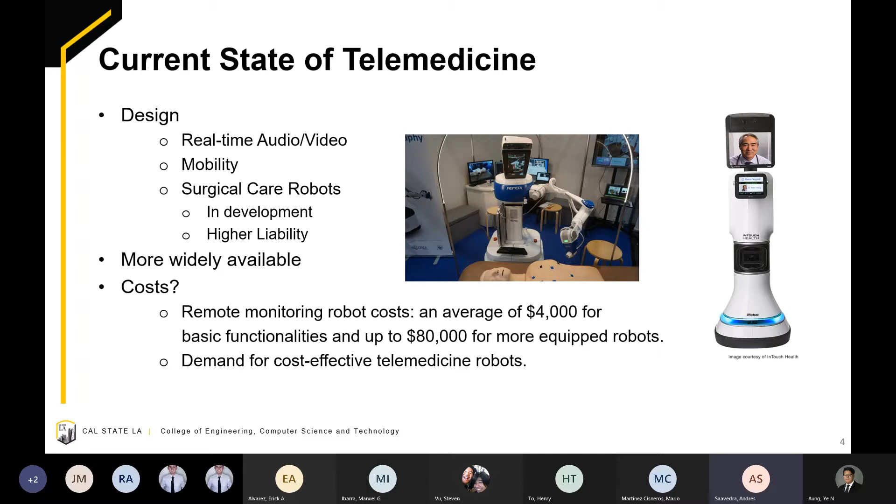The scope of the project includes the design and development of a low-cost telemedicine robot with the following capabilities. It will have driving capabilities for safely maneuvering through patients' homes, an extendable torso, wireless networking capabilities including transmitting audio and video in real time, as well as the ability to manipulate a gripper and measure body temperature.

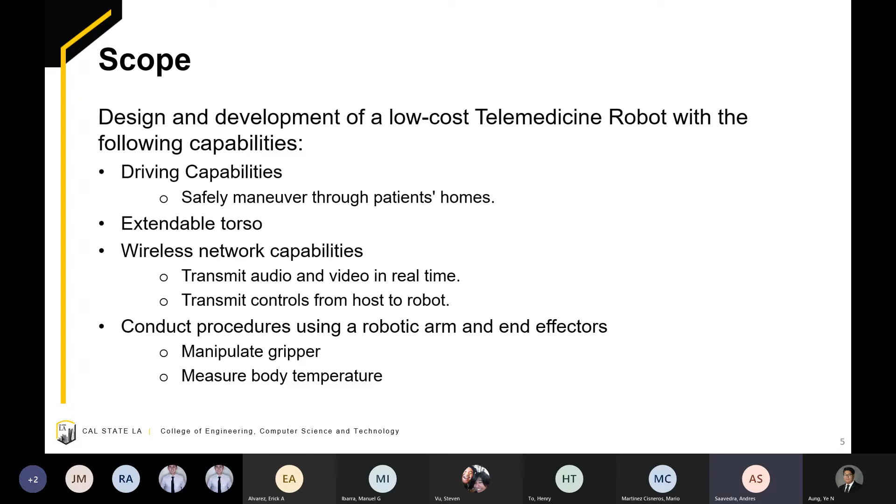On this slide, we have a breakdown of the sub-teams for the project. The robot body consists of two teams: the base platform and central chassis team. The base platform team is made up of Miguel Cano and Erick Alvarez, and the central chassis team is made up of Christian Velez and Reynaldo Aguirre.

The central controller and camera team consists of Steven Vu and Mario Cisneros. The robotic arm was also split between electrical and mechanical sub-teams, with the electrical team consisting of Aung, Andres Saavedra, and Jose Martinez, and the mechanical team consisting of Manuel Ibarra and Henry To.

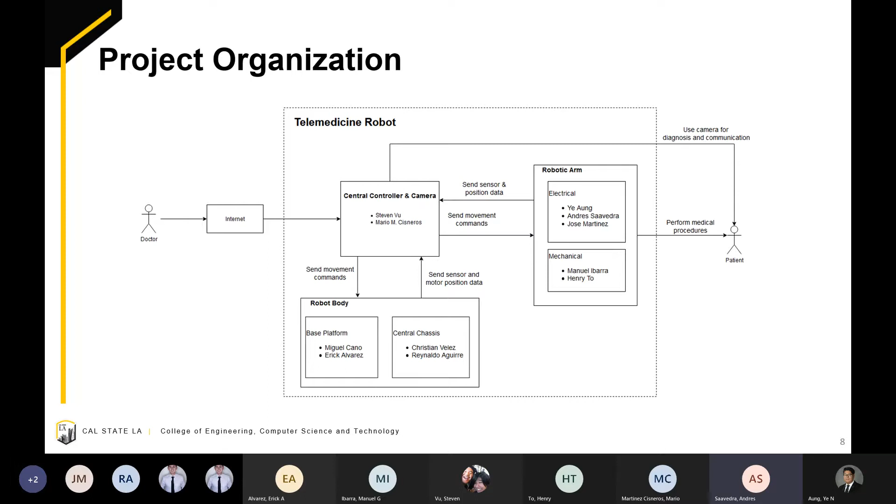My name is Miguel, and my team member is Erick, and we will be presenting the base platform.

Here we compare the current design with the old design. The old design's total weight was about 33 pounds, with the total cost being about $204. The new design is 16.2 pounds and costs $34.42. Comparing the old with the new design, it weighs 16.82 pounds less and costs $169 cheaper.

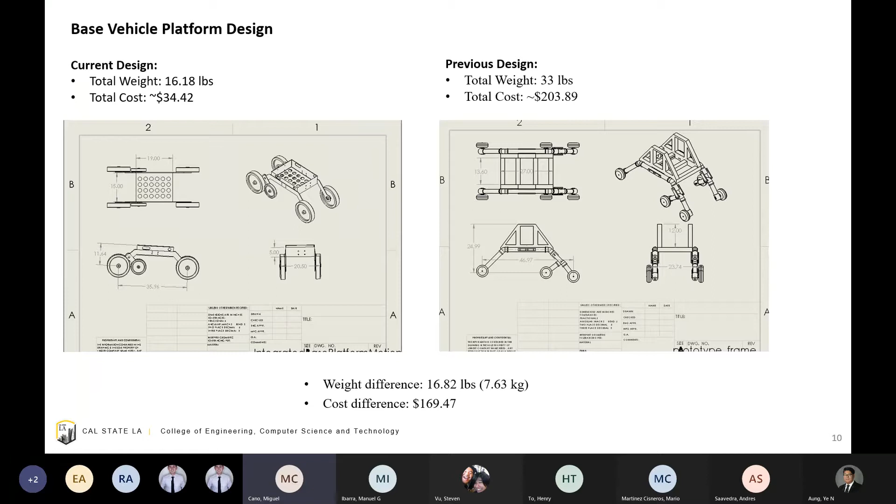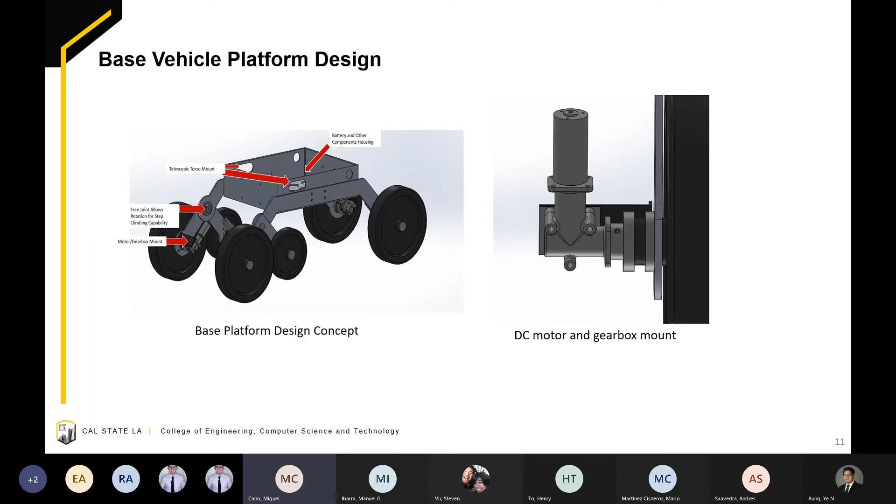Here we have the base platform design concept. The design features a mount for the telescopic torso subsystem, a housing for batteries and other components, a motor gearbox mount, and a free joint on the front legs that allows rotation for step climbing capability. The design is powered by 6 DC motors, and on the right we have a zoomed-in view of the gearbox and DC motor mount.

One of our subsystem requirements was to be able to support the total weight of the robot of 60 pounds. To test the strength of the 7075 aluminum design, an FEA simulation was performed. The design was fixed about the wheel mounts, pin and bolt connectors were added, gravity was applied to simulate the weight of the frame, and an 80-pound force was applied to the base.

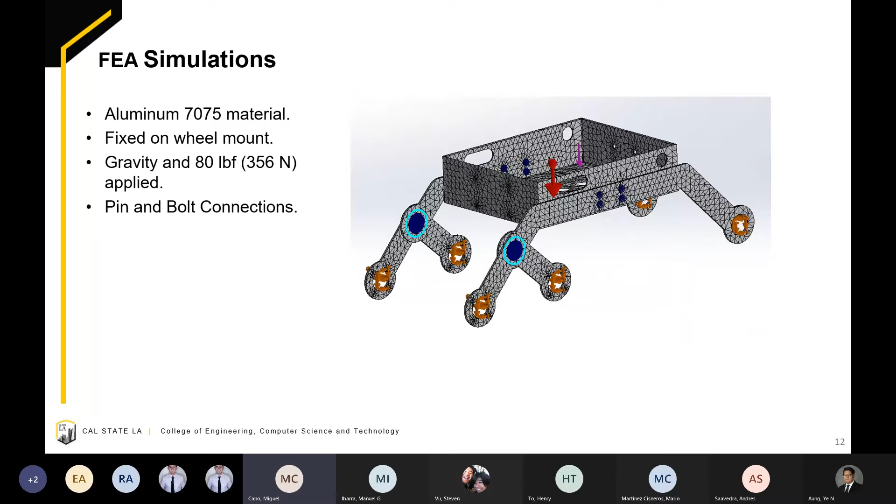The stress plot generated is shown on the right. The maximum stress experienced by the frame was 99.6 megapascals, which was below the yield point of 505 megapascals.

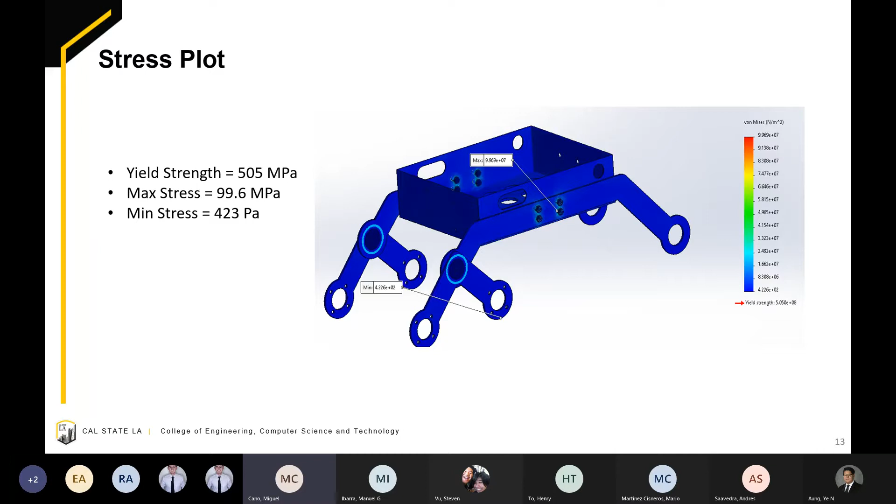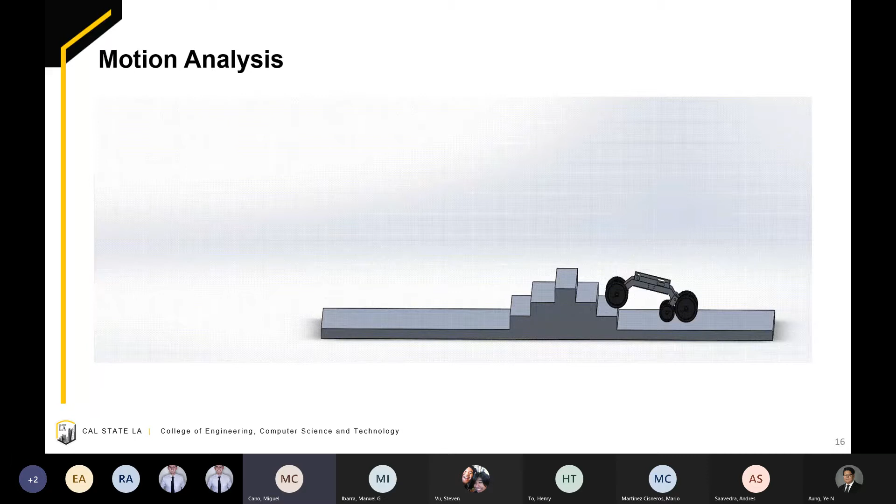A motion analysis was performed to test the step climbing capability of our design. Gravity was turned on and a 60-pound force was applied to the top of the base. The design was only able to climb the steps when all 6 motors were used.

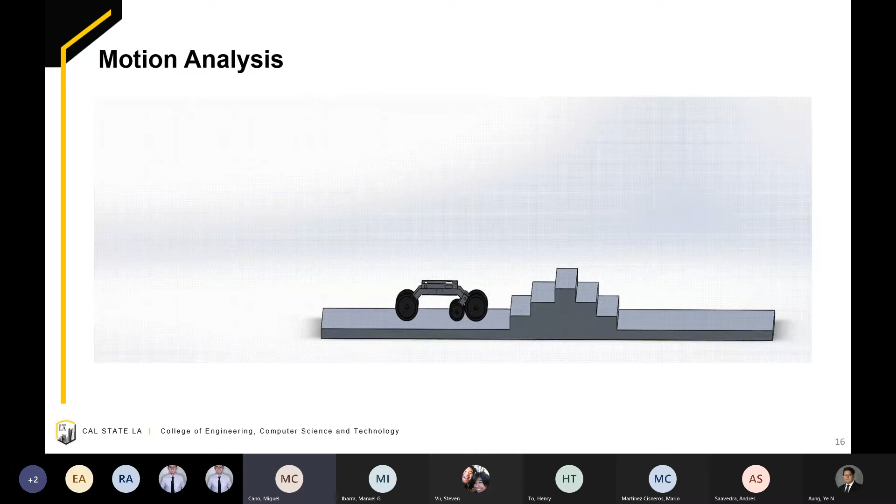The minimum kinetic friction coefficient required to climb the steps was 0.75, and 0.76 for static friction. 12-inch wheels were also required to climb the average step size of 6 inches.

Here we have the motor torque required on each wheel to climb steps. The maximum torque required from our motors was about 2,000 Newton meters.

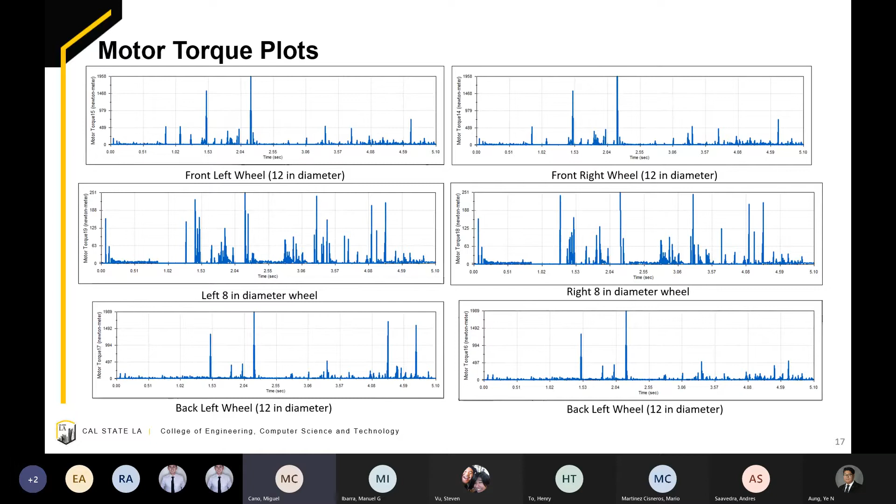Hi, my name is Erick Alvarez. I'll be talking about the DC motor control and the batteries for the robot.

We will be using the BeagleBone Blue in order to control the DC motor. It is Wi-Fi and Bluetooth compatible, which will allow the doctor or nurse to have control of the robot from a distance. The BeagleBone Blue will allow us to create a kill switch so that the robot avoids running into obstacles.

The motor comes with a built-in optical encoder, which can help the robot detect its surroundings. It also allows for 103 Newton meters of torque, which is fairly high for a DC motor.

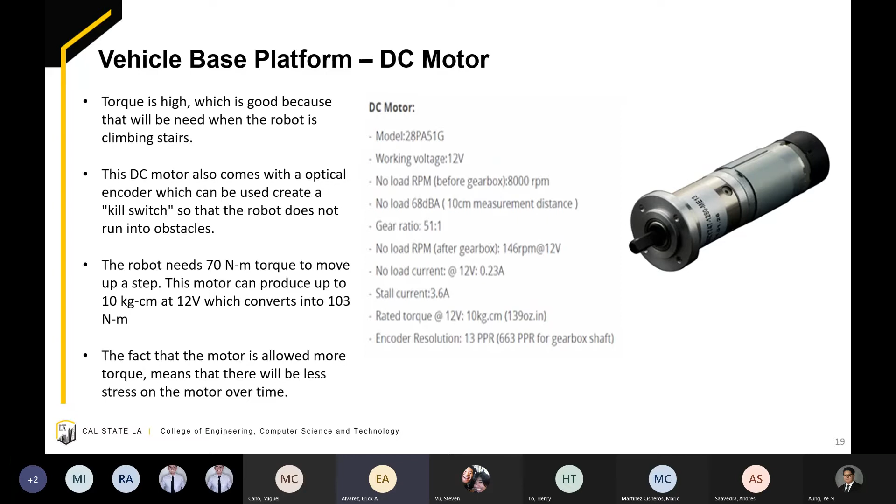This is our power consumption data table. This is worst case analysis, as in all the components are using maximum power at the same time. In order for the microcontrollers to last 40 minutes, they need 7,600 milliamp hours, and in order for the motors to last 25 minutes, we need 20,000 milliamp hours.

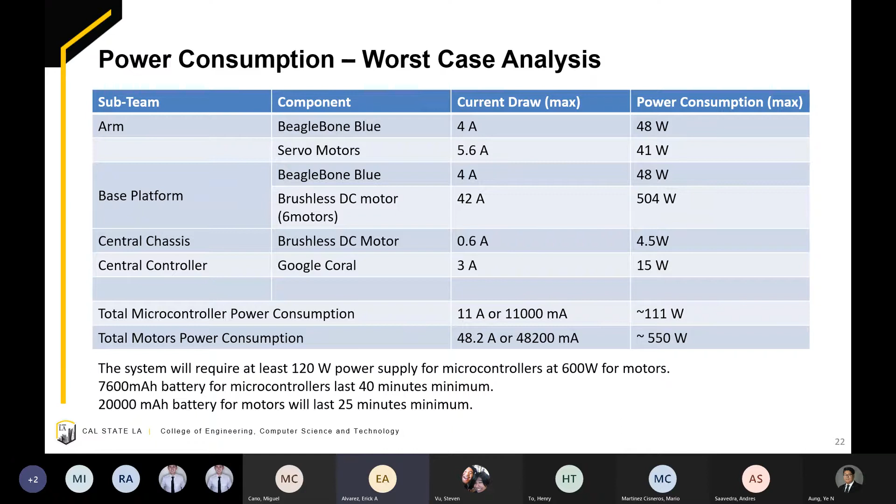Because there are so many components, we thought it'd be best to have 2 separate batteries. This is the one for the vehicle base platform. It's easy to integrate with DC motors, and it's designed for multi-motor use, which we'll need for our 6 motors.

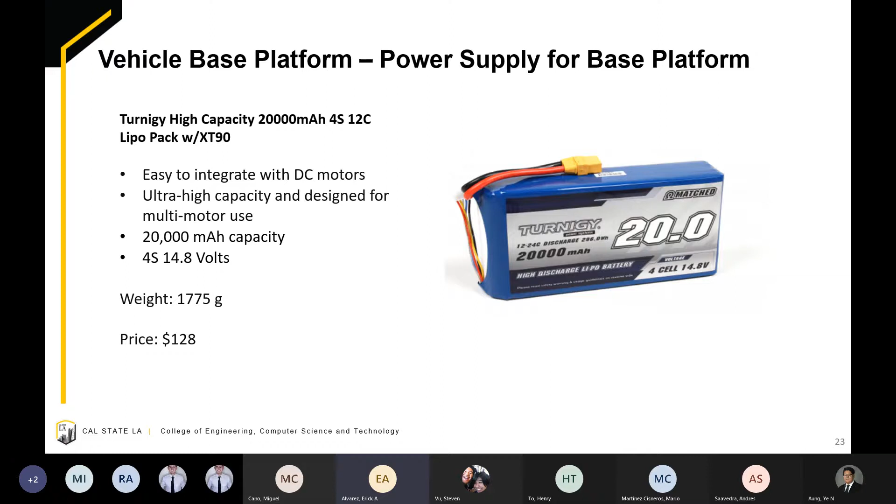This battery will be used for the rest of the robot. It is a rechargeable, high-capacity lithium-ion battery, and it can last up to 2.5 hours.

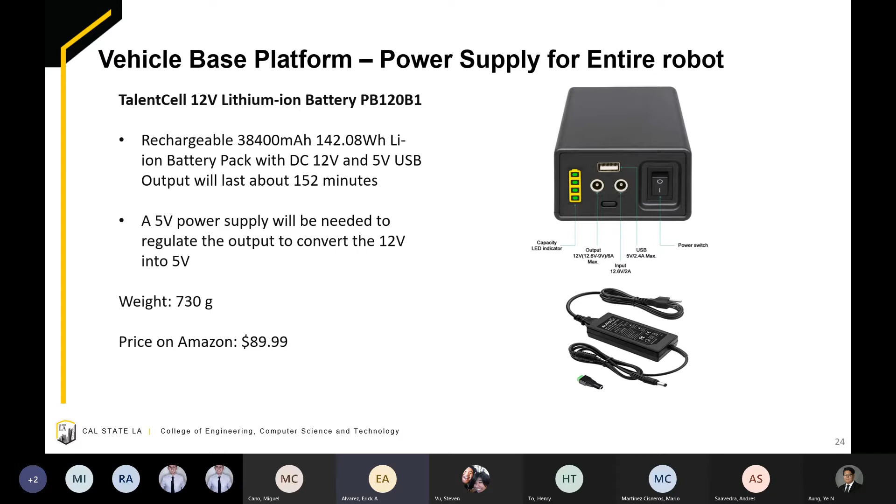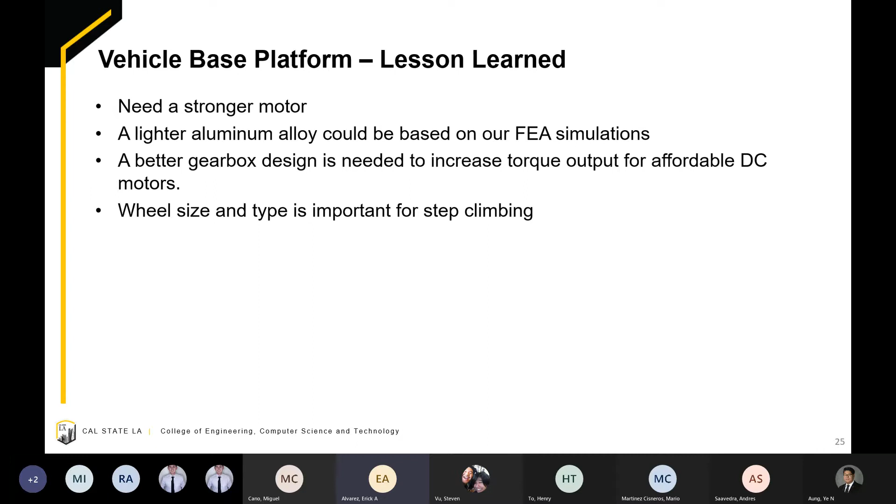Lessons learned: Originally, we had a weaker motor, so we had to find a stronger motor with a higher torque. Then we had to use a lighter aluminum to shave off some of the weight from the platform. Also, to move up the steps, we needed to create a gearbox for the rear wheels to create a higher torque, and more affordable DC motors. We also learned that the wheel size and type are important for step climbing.

Hi, my name is Christian Velez, and I work with Reynaldo in the central chassis team.

Rods were also applied for added support. And going into the current design...

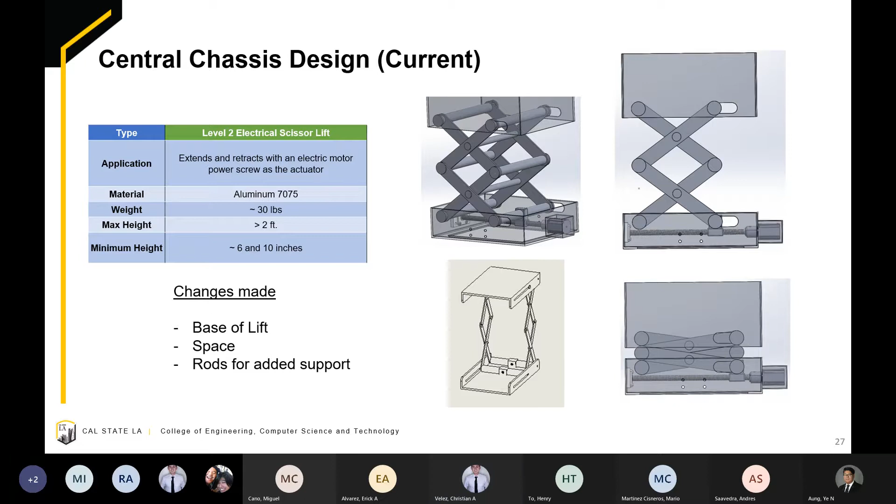The scissor lift is able to support the experienced load, the effective load of 40 pounds: 30 from added components, and 10 from the scissor lift components itself.

The force required to raise a load of 40 pounds is 110 pounds. So the actuator design that was chosen was a power screw driven by a motor to provide a mechanical advantage to the design. In order to determine motor size and screw design, the drive torque was determined to be 10 pound-inch to lift the load.

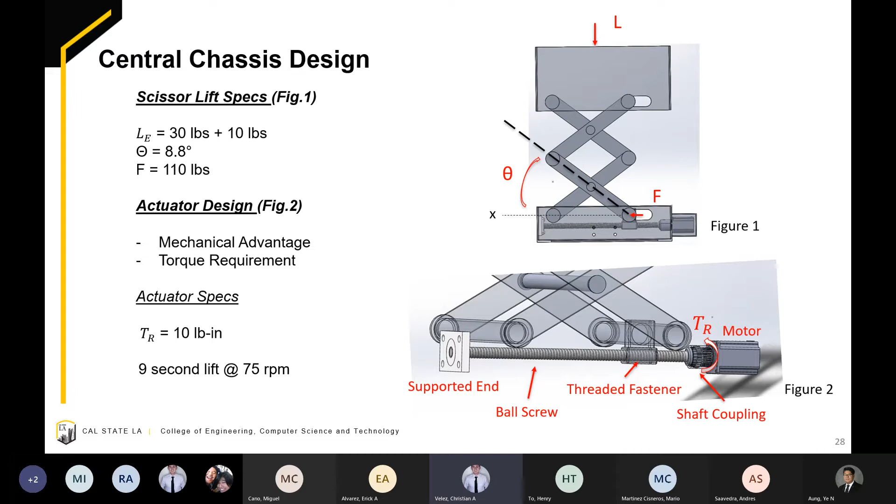This current ball screw design is able to lift the robot in a total of 9 seconds at 75 RPMs. In the next slide, the chosen motor will be discussed.

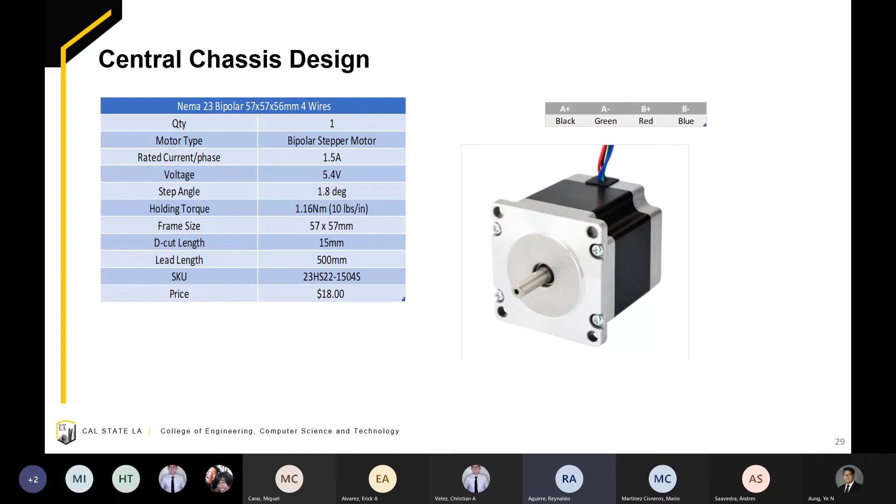To accommodate the new central chassis design, we have now decided to use a bipolar stepper motor. This stepper motor will have a holding torque of about 10 pounds per inch and will cost about $18.

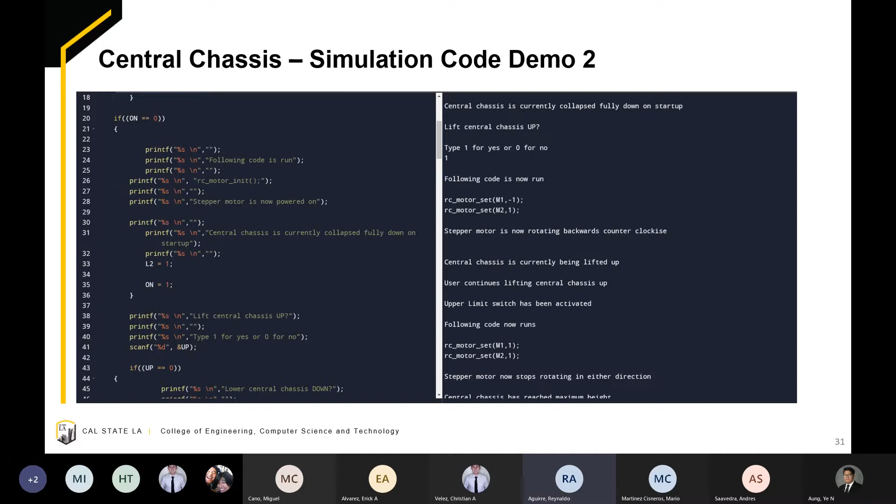In the second demo here, the user now wishes to raise the central chassis fully, extending it up. And like before, the upper limit switch will activate to stop the stepper motor from rotating further.

Some things learned during the project was that we should use a different microcontroller, as the BeagleBone Blue wasn't compatible with later components we wish to use on the central chassis. And regarding sterilization, we hope any future teams can test and prove which methods are effective due to the restrictions preventing any testing for now.

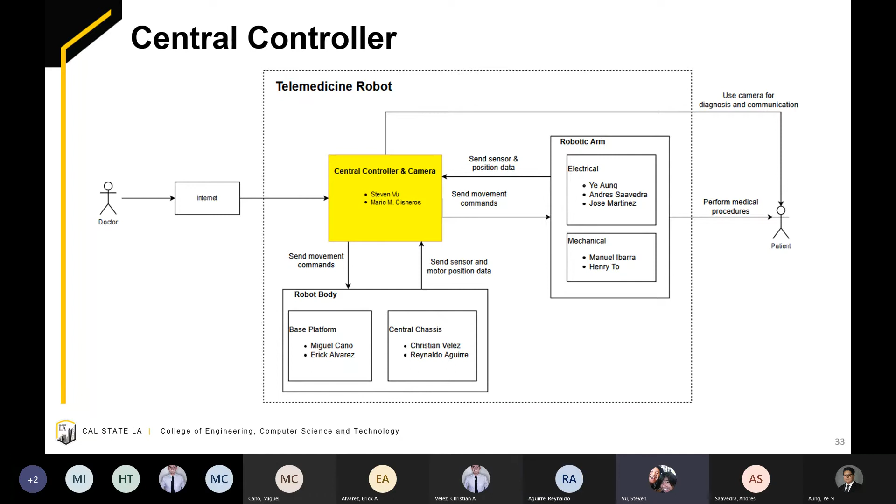So this is the original design of our central controller and its networking. It's showing how everything is connected from the user towards the server, and from the server towards the central controller.

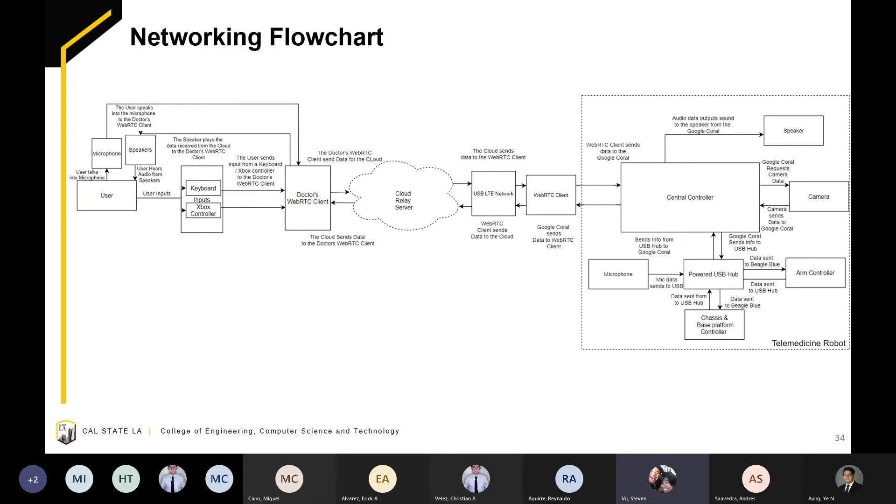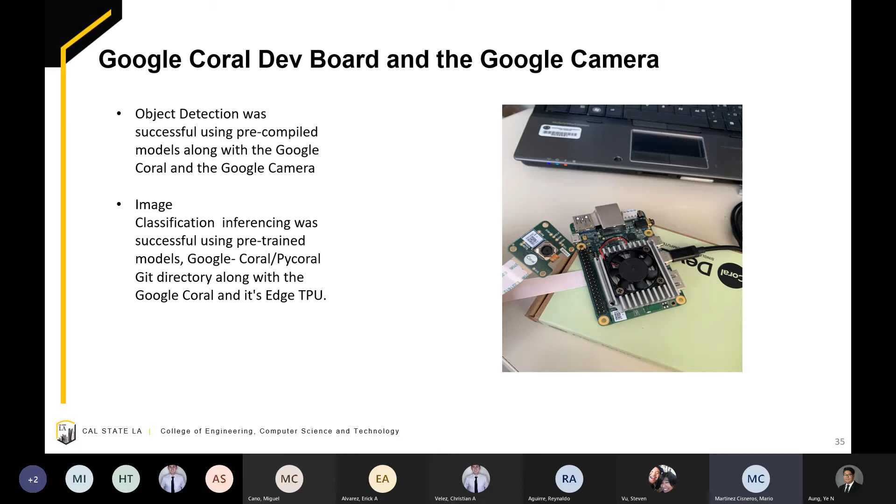Object detection was successful using precompiled models along with the Google Coral and the Google Camera. Image classification inferencing was successful using pre-trained models, Google Coral, PyCoral Git directory, along with the Google Coral and its Edge TPU.

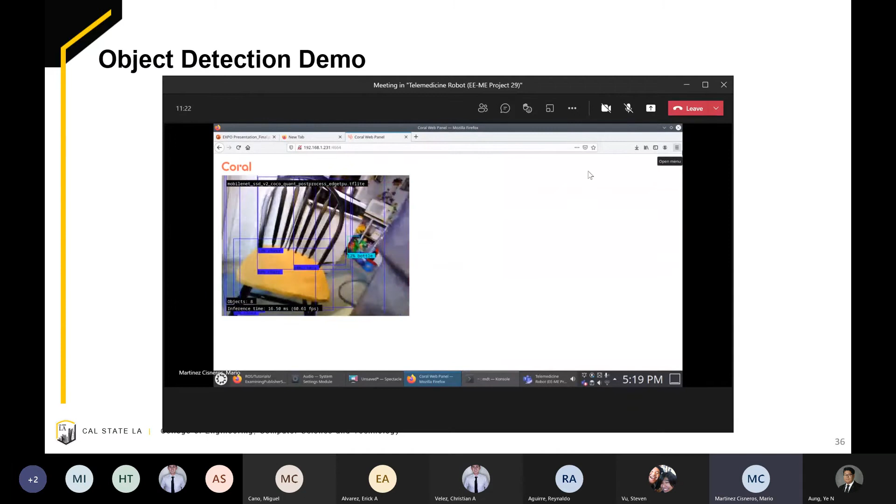Object detection was achieved by using precompiled models and a pre-built demo application called Edge TPU Server, which points to the precompiled models. We can see a live view using the Coral camera running through the Edge TPU and the model. We can see the live object detection inferencing on the screen.

Weight imprinting was used to retrain an image classification model. The demo on the Coral page trains the model to recognize 10 classes. I then added 7 classes, so in total we now have 17 classes. We can always retrain this model to recognize a new class.

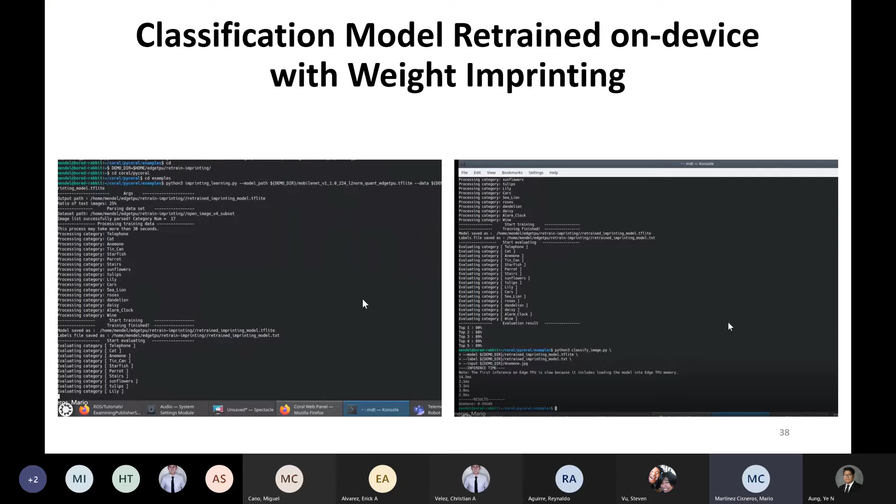Once the server is initiated, the user establishes a media connection on the handler, which tells the server that the media was obtained. Next, the user sends this info to the server and sends a URL to the patient.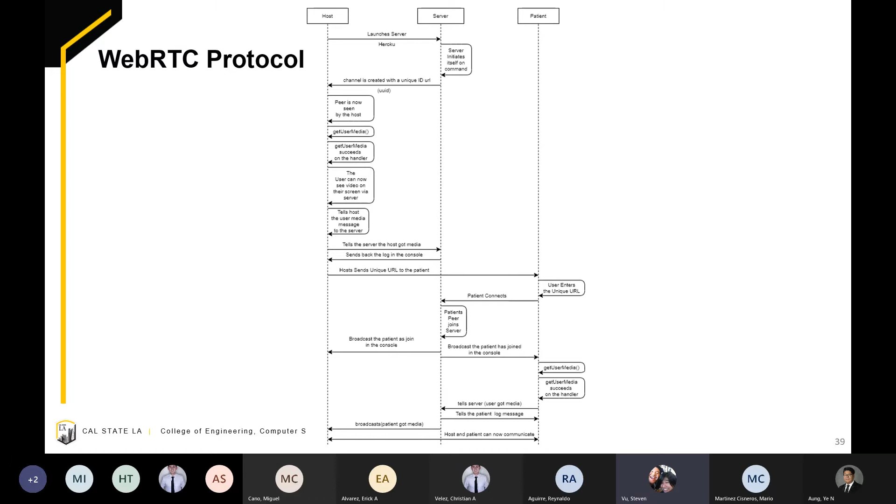And once the server establishes the media connection, once the connection from peer-to-peer is confirmed, they are able to talk to each other via audio and video.

So in my demo, I am deploying a cloud-based service, Heroku. The terminal auto launches our server with a unique ID, which I will be highlighting at a specific part of my URL.

Now I am deploying another link to show that these two rooms have different URLs, to prove that these two rooms are unique.

Now I send the first link to another computer and it is entered as shown. In the other tab, we will see that the other computer did not join, which is a good thing, because we only want the first link that we use to initialize to have the new computer or peer-to-peer connection to show.

So at this moment, I am testing if this message is being sent from the second link to the first link, which is not something we want, which is shown on the right.

Now I am typing from the main computer to my laptop, which is hosting the server. And we can see that 'hello' was shown on the main server.

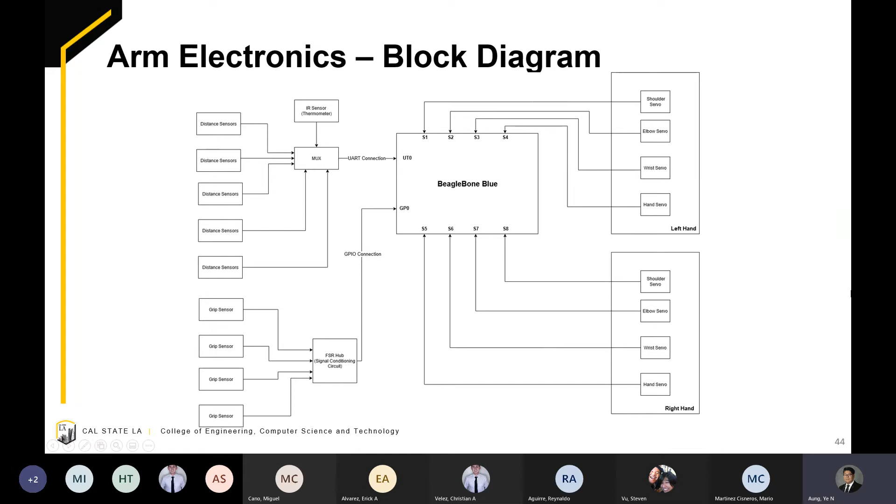This block diagram shows how all the electronic systems will be integrated together with the BeagleBone Blue. However, we were not able to implement this system due to the COVID-19 restrictions. So we developed each sensor system as well as the motor system independently and created test benches for each subsystem.

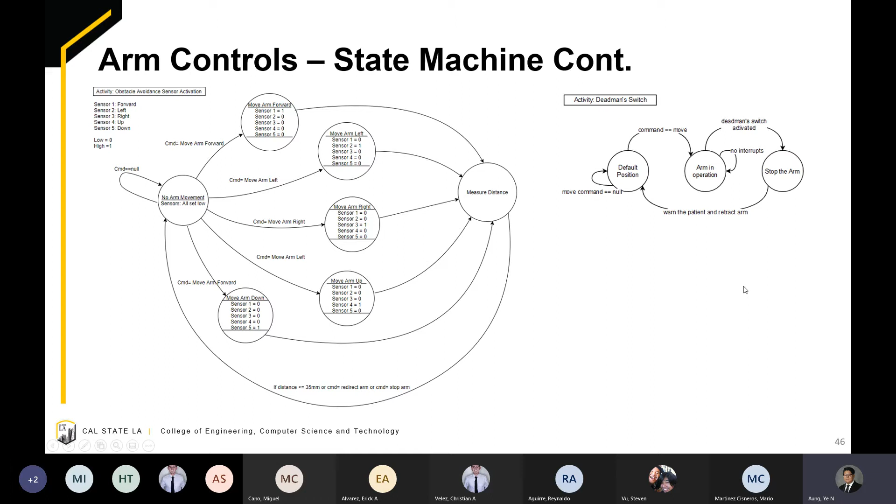These were the finite state machines we developed in the beginning of the year to help us as a guide in implementing our code, as well as these are the finite state machines for implementing the code for distance sensors as well as the deadman switch algorithm.

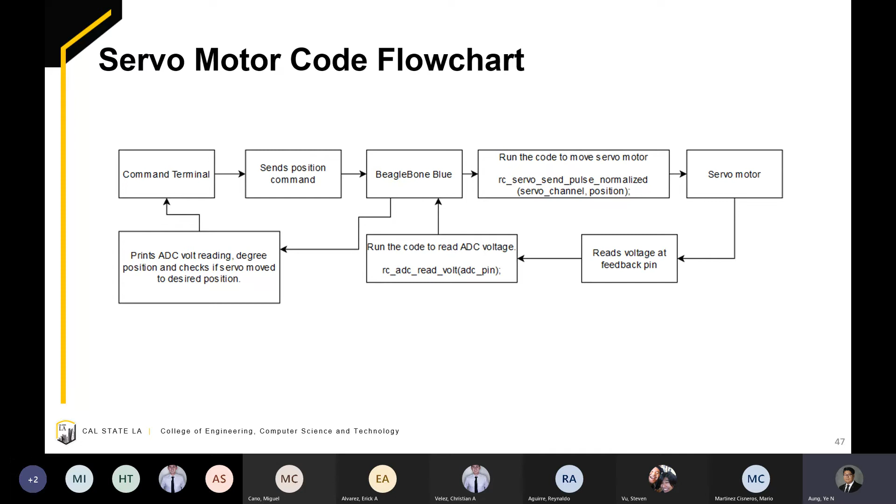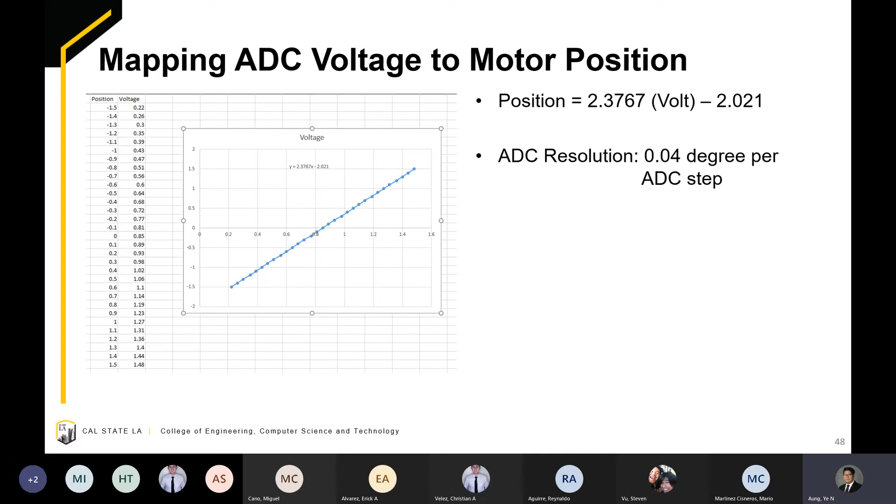Here you can see how we map the ADC voltage to the motor position. An equation was generated on Excel using the trendline functions and graphing through position and voltage data points. With the current setup, the mapping yields ADC resolution about 0.04 degree per ADC step as so far.

Hello, my name is Jose, and I'll go in depth with the servo motor. Here you can see the test bench for the servo motor and the schematic of the setup. The BeagleBone Blue is connected to the servo motor signal pin where it will receive the movement commands. The servo motor is also powered by an external 5-volt power source.

We updated the circuit to include the ADC port from the BeagleBone Blue and added a voltage divider circuit. The ADC pin is utilized to read the position feedback of the servo motor. The feedback pin is connected to a voltage divider with two 10K resistors to scale the voltage level.

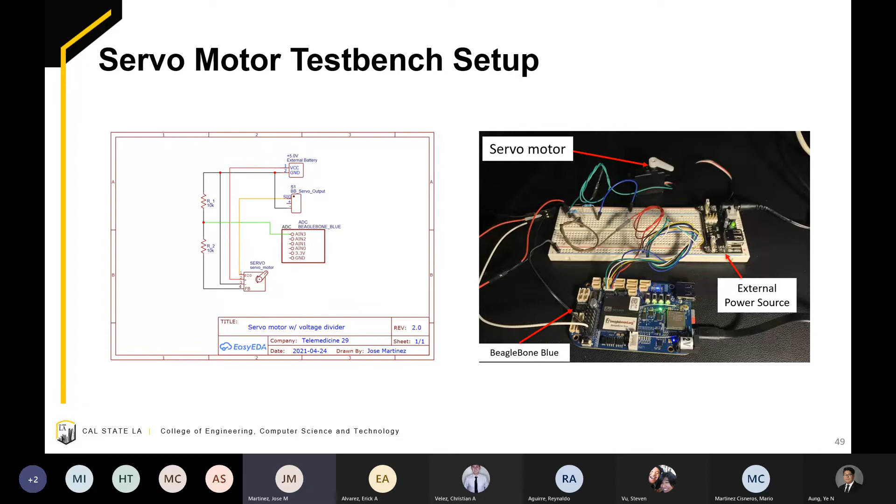The original plan was to incorporate 4 motors, but due to COVID restrictions and limited time, we were only able to test out 1 servo motor.

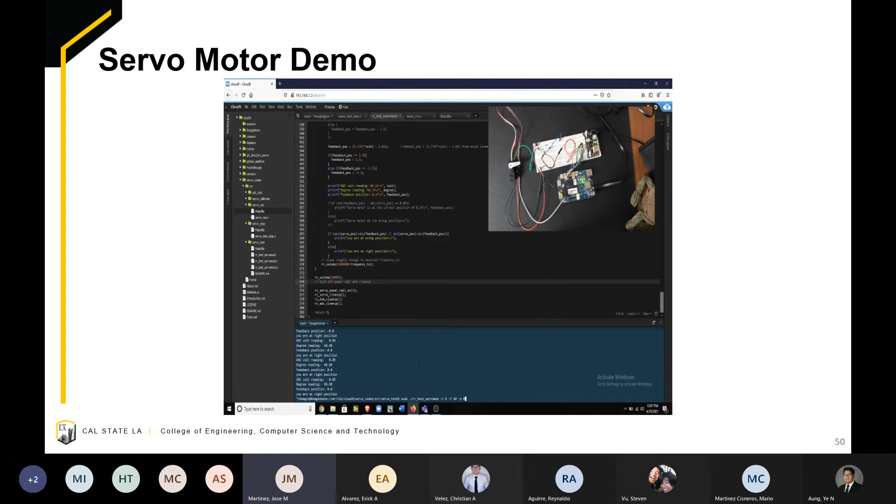In this slide, we have a servo motor demonstration that shows how the user will control the servo. The user will input a desired position between 1.5 to negative 1.5 inside the command terminal, which in this case is Cloud9. The command will then be sent to the BeagleBone Blue, which will then signal the servo to move to the desired position. The servo motor has a feedback that will let us know if the servo reached the desired position or not. If the servo motor does reach the user's desired position, the terminal will indicate it, and if it doesn't, the terminal will also indicate it.

Hello, this is Andres, and I was responsible for the arm's obstacle avoidance and body temperature measurement functions of the robot. Here we have an electrical schematic that consists of time of flight distance sensors and a contactless thermometer connected to an Arduino Uno instead of the BeagleBone Blue due to reliability issues with the hardware.

A total of 5 distance sensors were required for the robotic arm to ensure that the arm is capable of detecting obstacles in every direction, along with the contactless thermometer for measuring a patient's body temperature. These components all utilize I2C serial communication protocol.

To use I2C, the sensors were connected to the serial data line and serial clock line of the Arduino Uno. An 8-to-1 multiplexer is also required to connect the X-shut pins of the distance sensors to the GPIO pins, allowing the sensors to be activated and deactivated for taking distance measurements. Unfortunately, the contactless thermometer would not work and was not detectable on the I2C bus, indicating the possibility of faulty hardware.

The physical test bench consisted of the Arduino Uno microcontroller with the time of flight sensors connected to an 8-to-1 mux and a temperature sensor on two breadboards.

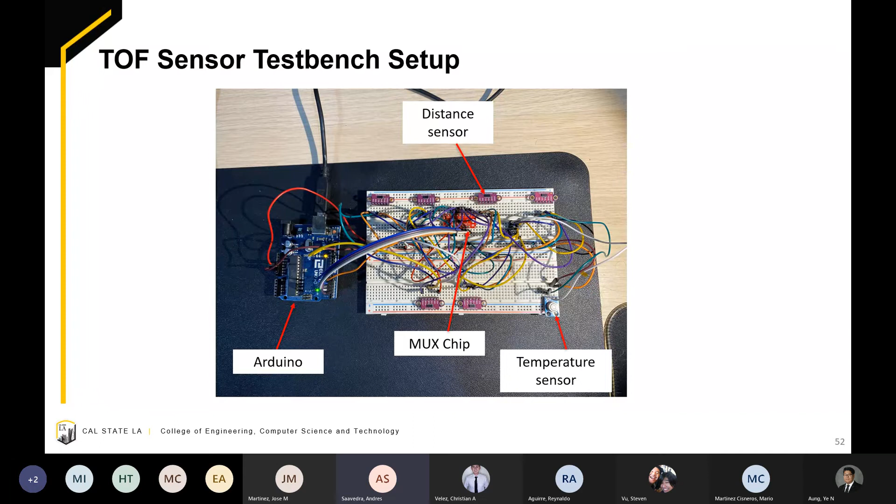The code flowchart for the time of flight sensor demonstrates the functionality of the code. This mostly consists of setting up the GPIO pins, initializing the I2C bus with the sensor API, and running the

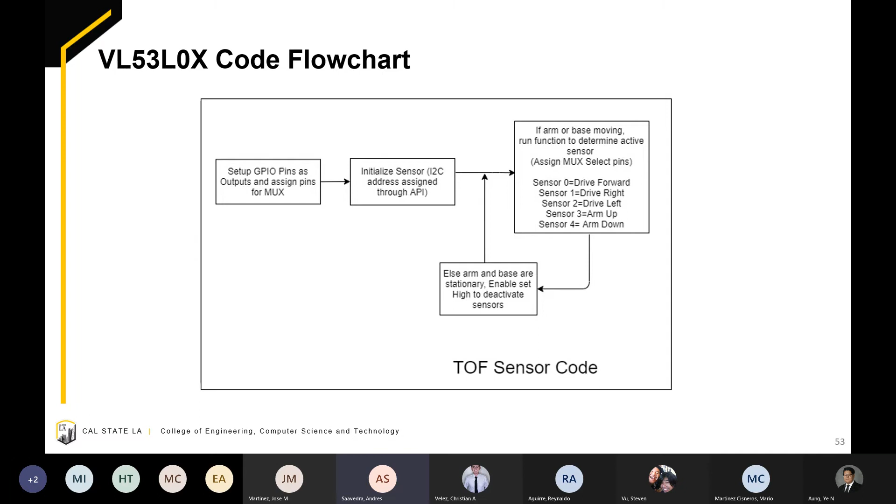functions that determine the currently active sensor, determined by arm or base movement. If the arm or base are not moving, all the sensors are deactivated.

This truth table demonstrates the logic for how an individual time of flight sensor can be activated with the 8-to-1 mux. The select pins determine which X-shut pin from the time of flight sensor stays high, activating the required sensor while the rest remain powered off.

The enable pin is normally active low to allow a sensor to be activated. When the robot arm or base is not in motion, the enable pin will be set high, shutting off all the sensors.

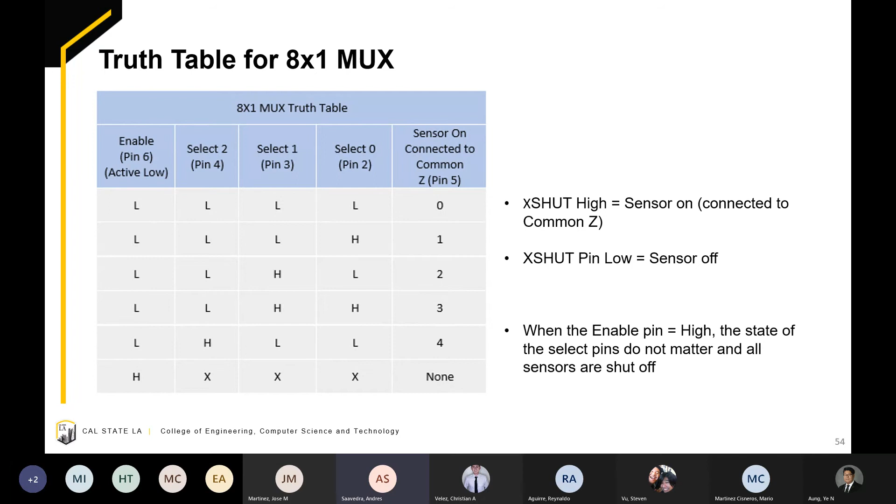The Arduino displays an out of range message when nothing is detected, and a value in millimeters when an object is detected. When the object is too close to the sensor, it will display the object detected within range message.

When fully implemented with ROS, this would deactivate the arm and base motors and default to a safe state.

With all of our research and troubleshooting, the electronics arm team learned some valuable lessons. We found the BeagleBone Blue microcontroller to be unreliable and overcomplicated for sensor data acquisition. The Arduino, with its vast libraries, would provide a smoother integration of our systems.

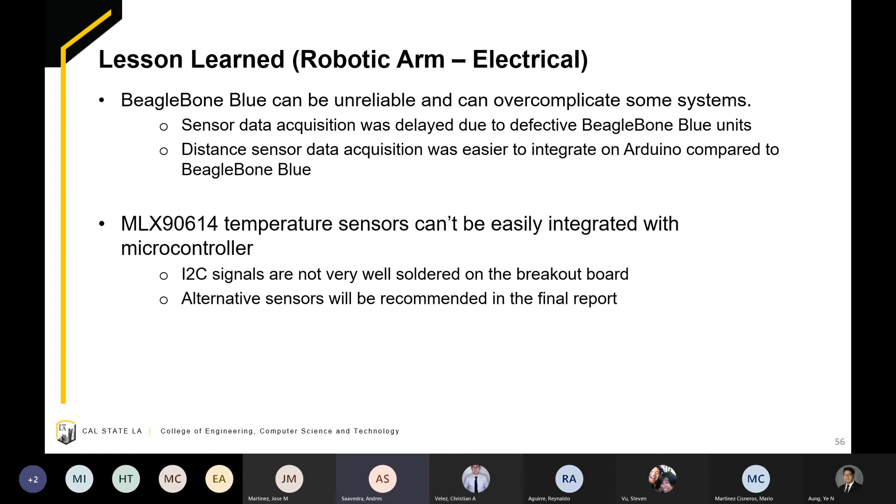Another lesson is to avoid purchasing low-quality components. The MLX90614 contactless thermometer was not detectable on the I2C bus, most likely due to faulty hardware or inadequate soldering onto the breakout board.

Hi, my name is Henry, and I was assigned to design the mechanical arm with the help of my partner, Manuel. These are an overview of the robotic arm. On the image on the left is the robotic arm itself, and the image on the right is the end effectors.

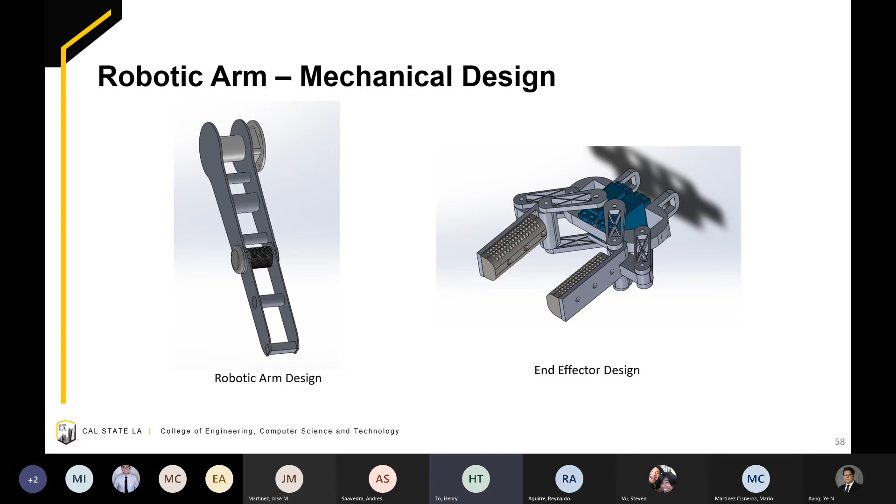Here is a trade table of the different materials we thought of using for the mechanical arm. We chose 6061 aluminum because of FEA purposes, high mechanical properties, and its low cost.

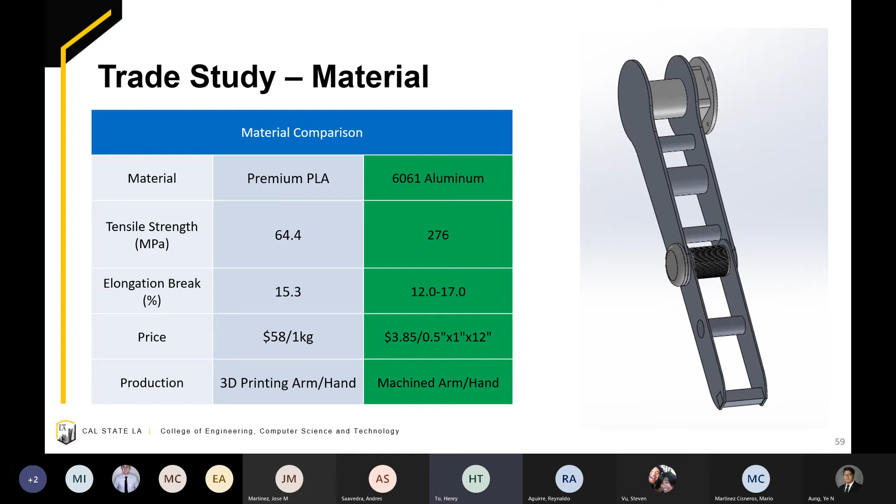This is a tech drawing of the mechanical arm. Its reach is roughly around 2 feet, which is close to one of our requirements for the robot. Also, its overall weight was around 6 pounds per arm.

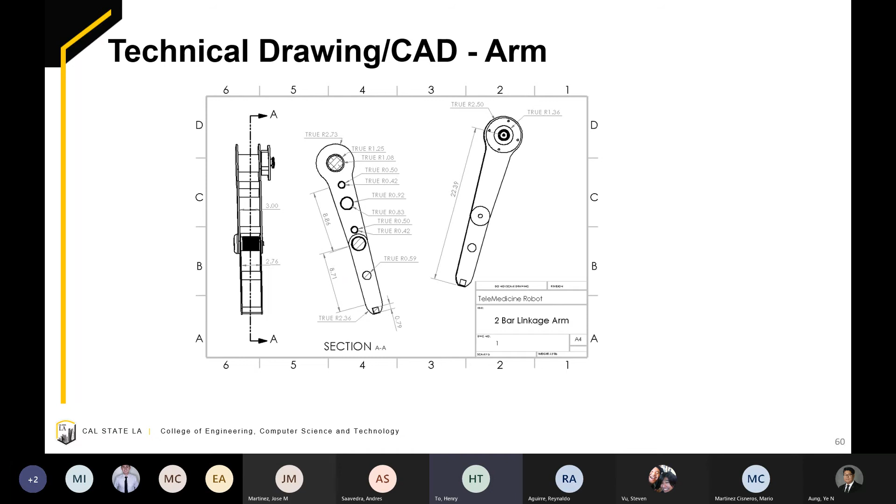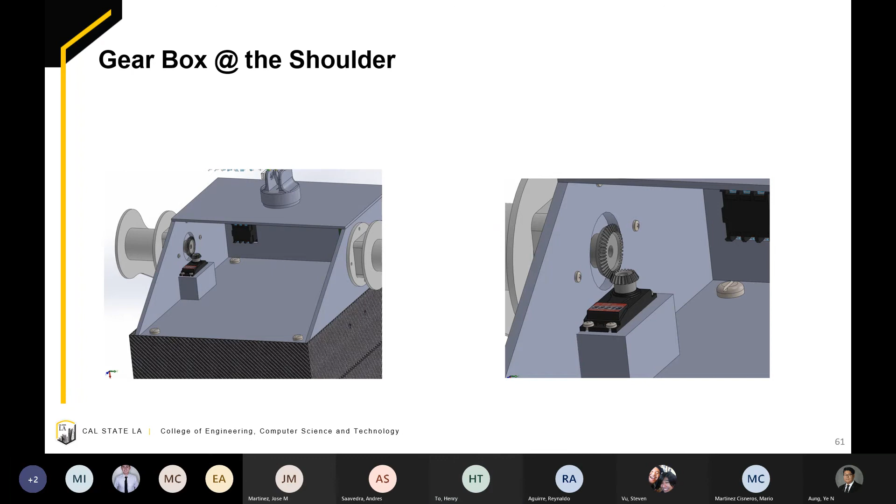This is an image of the servos being set up inside for the shoulder. This is how the servos would be set up for the elbow. Each servo would have a 2-to-1 gear ratio set up to increase that torque output.

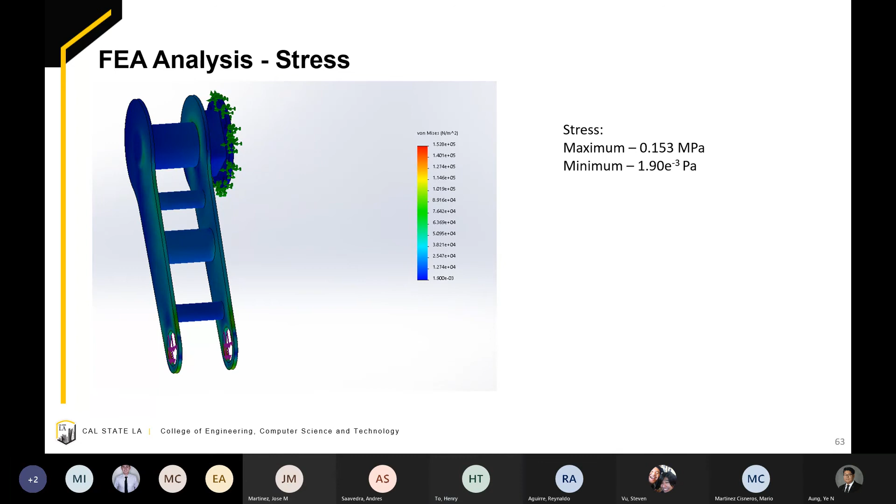Next slide. This is a displacement of the arm where most of the deformation...

Here's the stress analysis of the arm — I mean, displacement of the arm, where most of the deformation happened at the end of the link.

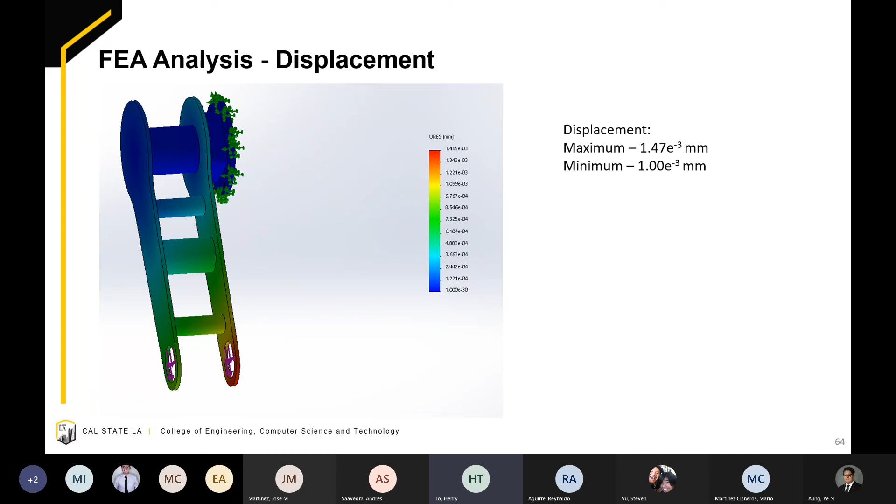Next, here are some plots and motion studies analyzing the torques and stress of the servo at each joint. The maximum output torque needed to move the entire arm with a 10 Newton force at the end is around 2.7 Newton meters, which is within range of the servo torque output at the shoulder.

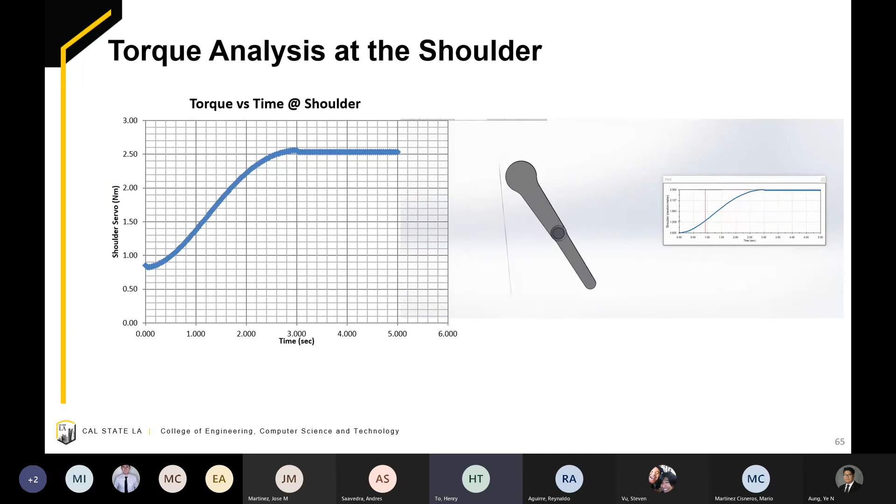At the elbow, the maximum torque output was 0.85 Newton meters, which was also in range of the servo at the elbow.

This is Manuel Ibarra, and I'll be talking about the end effectors and camera arm. This is a trade study of some of the considerations we had when finalizing our selection of an end effector. We ultimately went with a 4-bar linkage end effector, mainly for superior power and stability.

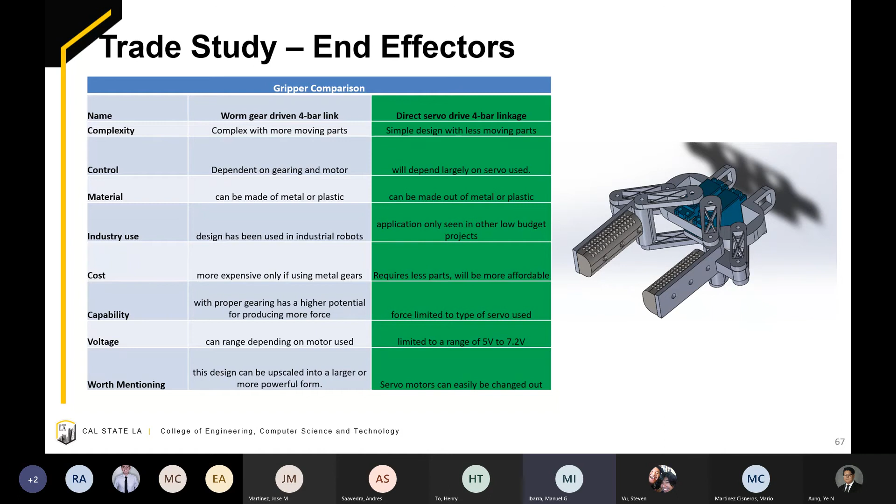This is a drawing of the latest end effector we came up with. It is a change from the originally proposed end effector that only used one servo. This gripper design will use dual servos with a stall torque of 15.5 kilogram-centimeters, and when complete, will weigh a little over 1 pound.

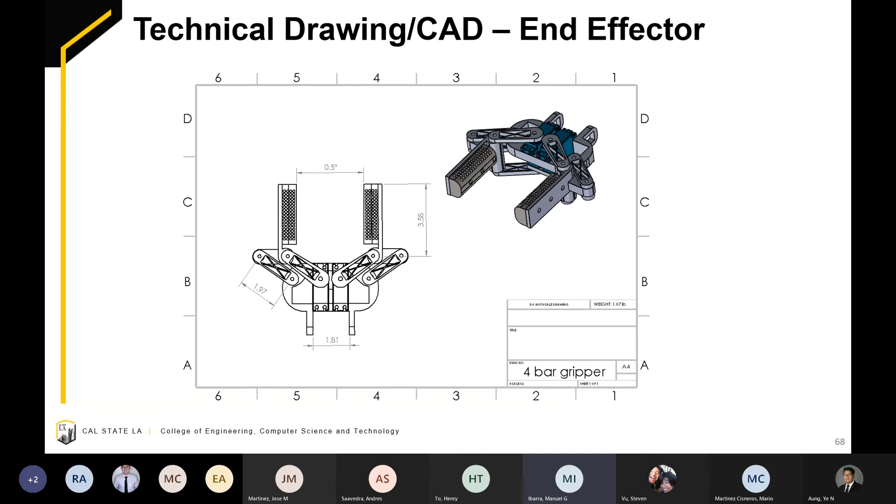Some of the gripper features: the gripper will be made out of 6061 aluminum. It will open up to a max width of 5 inches, as shown in the middle image. On the rightmost image, we can see the self-lubricating Oilite sleeve bearings. They will be placed at each joint and give the end effector a good balance between strength, wear resistance, and durability.

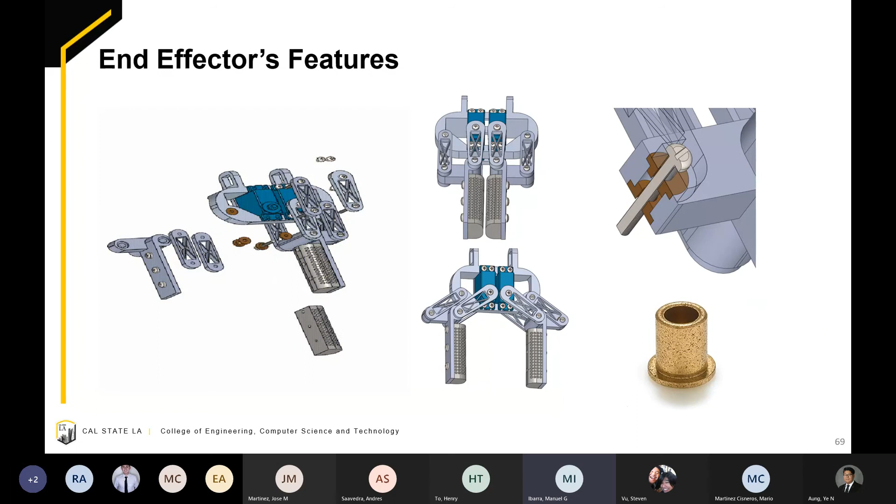So I chose a rubber gripper because with the use of 3D printing and rubber casting, we can create custom grippers that fulfill specific needs that may arise. This gripper design in particular has holes perforating the midsection of it, so that when the end effector is grabbing an object, the rubber gripper will conform to fit it and provide a sturdier grip.

On the rightmost figures, we can see the FEA analysis on the rubber gripper where a 6-pound load is applied. As predicted, the gripper has more deformation towards the center as it complies to the shape of the object it is coming in contact with.

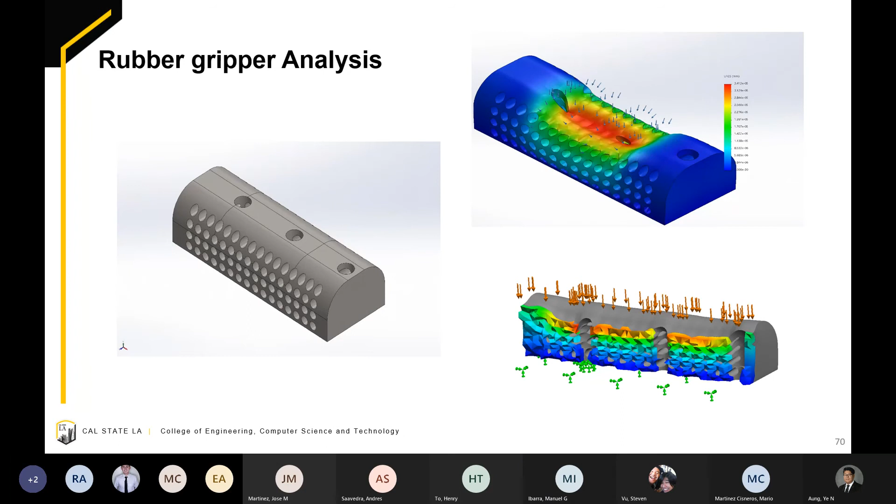A new addition to the robot is a camera arm. As our previous design was going to have a camera mounted on the end effectors, whereas the camera arm will reside atop the robot and be able to bring itself closer to better assess the patient.

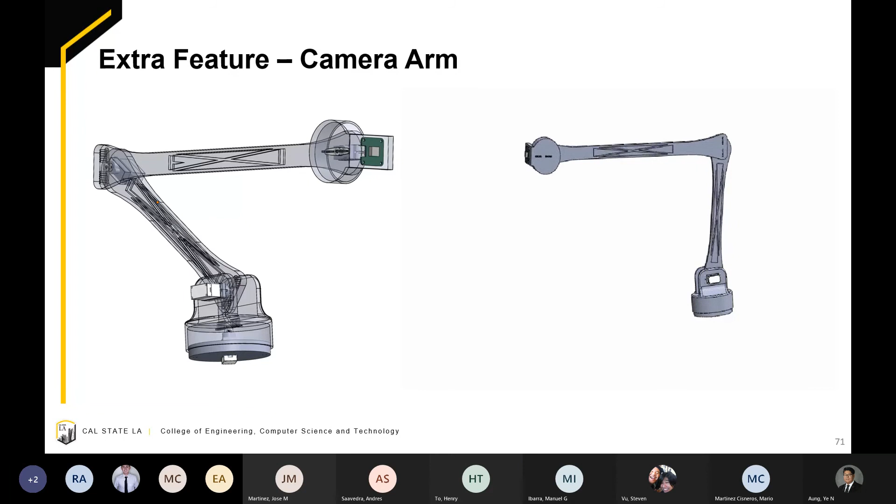The maximum reach is a little over 22 inches. It will be made out of PLA and will have a weight of about 1.17 pounds. The camera arm will use 4 FT117M servos. A coral camera placed at its end will have an 87.6 degree field of view.

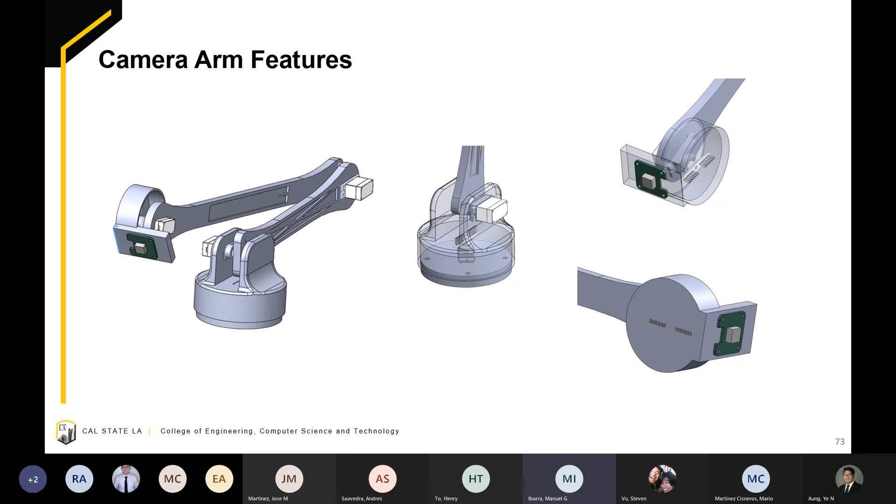So this about wraps up our technical progress part of the presentation. Now I will present about our future plans as well as the summary of the project.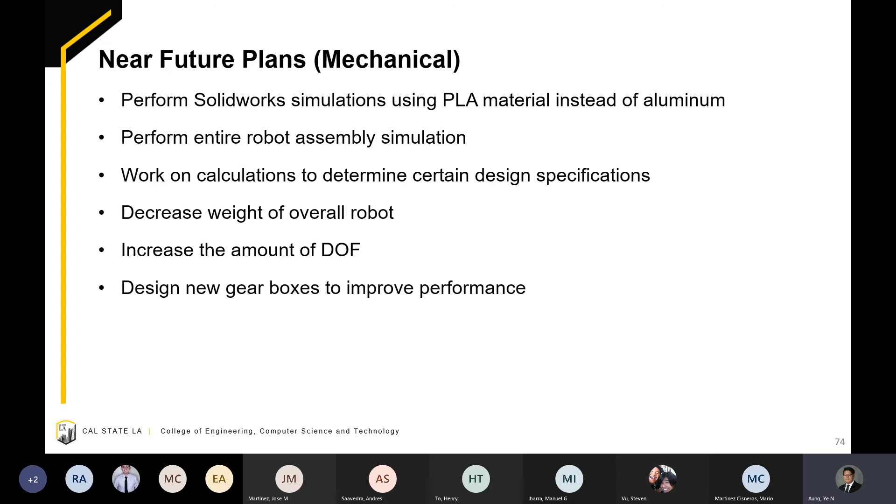As for the near future plans for the mechanical team, we would like to perform the SolidWorks simulations using PLA materials instead of the aluminums for certain components, as well as perform the robot assembly simulation for the entire robots with all the components assembled. We'll also like to decrease the overall weight of the robot, as well as increase the amount of degrees of freedom and design new gearboxes to improve performance in certain areas.

For the electrical team, we would like to develop test bench and test scripts for the FSR and IMU, which were delayed due to the defective BeagleBone Blue units, as well as implement MUX integration with multiple sensors. So switching on and off of multiple sensors can be achieved, especially with distance sensors.

We'll also like to implement ROS between the primary and secondary microcontroller communications in order to send commands to retrieve data from secondary microcontrollers. We'll also like to work on retraining object detection model using Docker. And finally, we'll like to complete documentation on our test scripts and codes for easier knowledge transfer to the next team.

In terms of recommending the future development plans for the next year's team, we'll like to recommend integrating ROS to sensors and motors to send movement commands as well as receive sensor data. We'll also like to recommend to migrate distance and temperature sensor data acquisition units to Arduino instead of BeagleBone Blue due to easier integration with ROS serial and the reliability issues on the BeagleBone Blue.

We'll also like to integrate different electronic subsystems via the sensor hub PCB that can be custom made, as well as achieve the physical assembly of the robot, as well as decrease the overall weight of the robot.

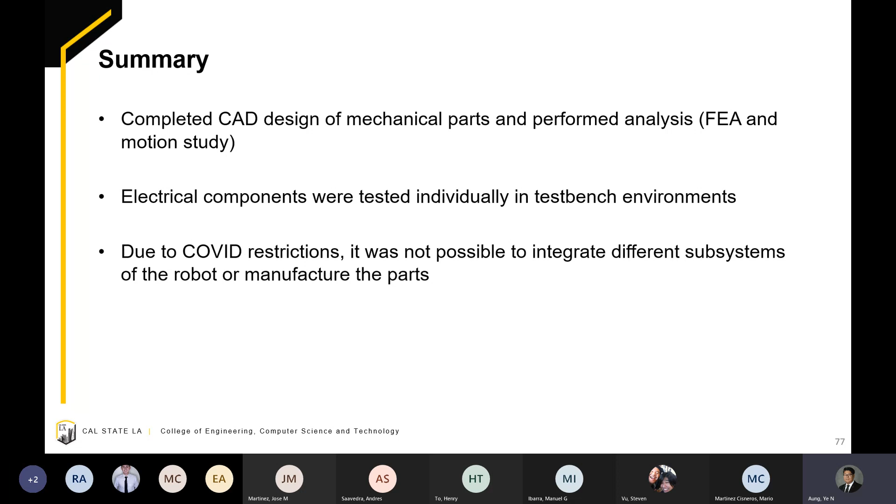So in summary, the mechanical teams was able to complete the CAD design of the mechanical parts and perform analysis on those components, which included FEA analysis and motion study. The electrical teams was able to test electrical components individually in test bench environments. However, all those different components and subsystems were not able to be integrated together due to the COVID restrictions.